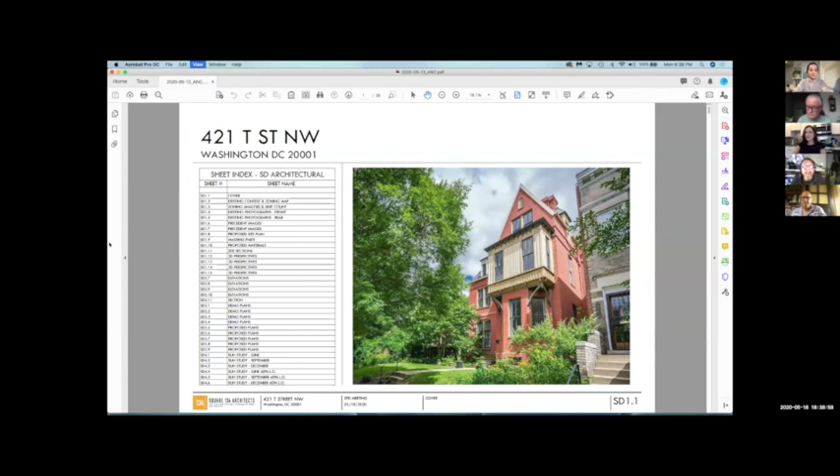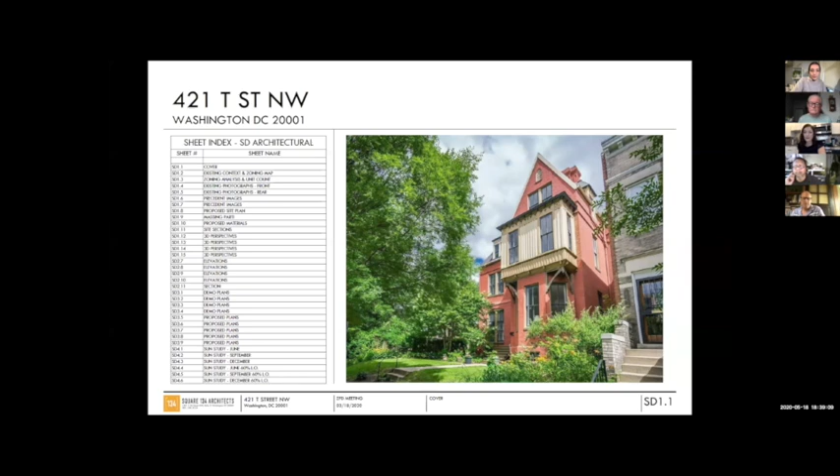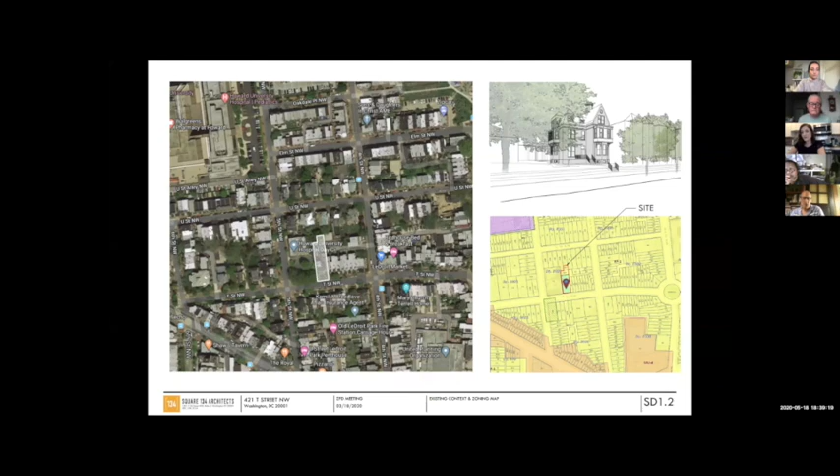This is 421 T Street. It was originally designed by James McGill, in the Victorian style, built in 1876. The property is located in LeDroit Park's historic district, on T Street between 4th and 5th Street Northwest.

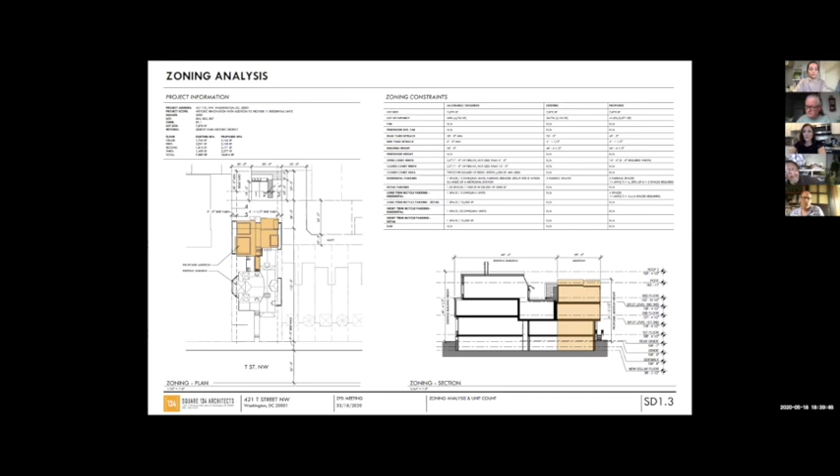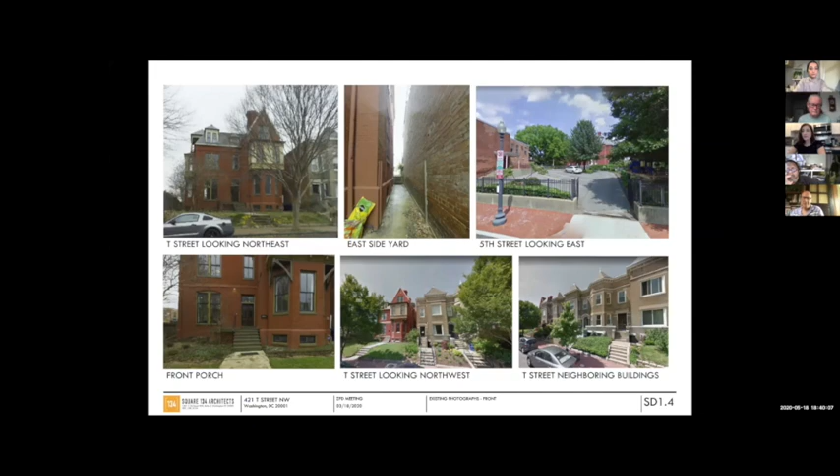Zoning will be covered by our land use attorney in more detail later, but as a brief overview, we are proposing a 29-foot addition, increasing the lot occupancy from approximately 27% to 42%, maintaining a proposed rear yard of 47 feet, with side yards matching the existing side yards of the property. For the existing building, we're interested in maintaining the character of the existing facades, and we were drawn to the asymmetry of the building, the geometrical ornamentation, and the variety and playfulness in both the bay projections and dormers.

For the proposed addition and changes to the existing building, we were very intentional. We're interested in removing the one-story addition along the west facade. Window changes were limited to the east facade because the majority of that facade is covered over by the adjacent neighbor. The rear addition will only take place in an area where there aren't any windows, so we wouldn't be impacting the original character of the exterior building.

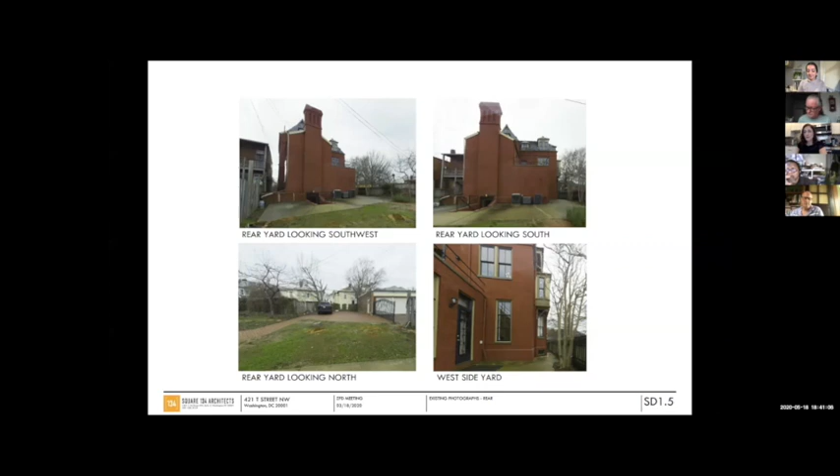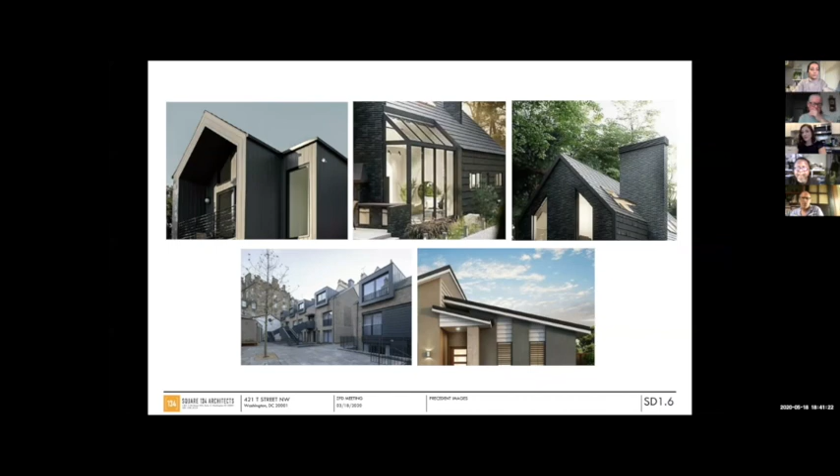We also met with HPO prior to doing any design changes to the building, and have been working with them diligently to develop the design. This is also about taking forms from the existing building and replicating them in a more modern interpretation, emphasizing the playfulness and ornamentation by providing bay projections and dormered windows.

We're also interested in using simple materials and forms to create a difference between the original facade and the proposed addition, using materials similar in proportion to relate to the existing structure. We also wanted to provide some form of transitional space between the original structure and the proposed addition.

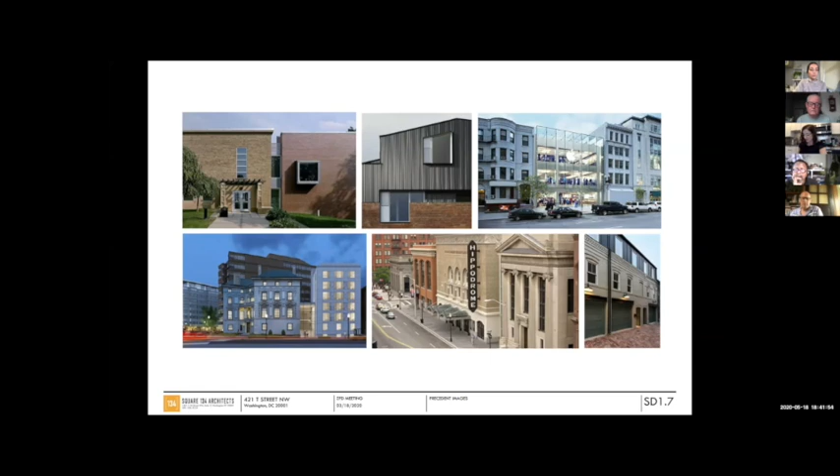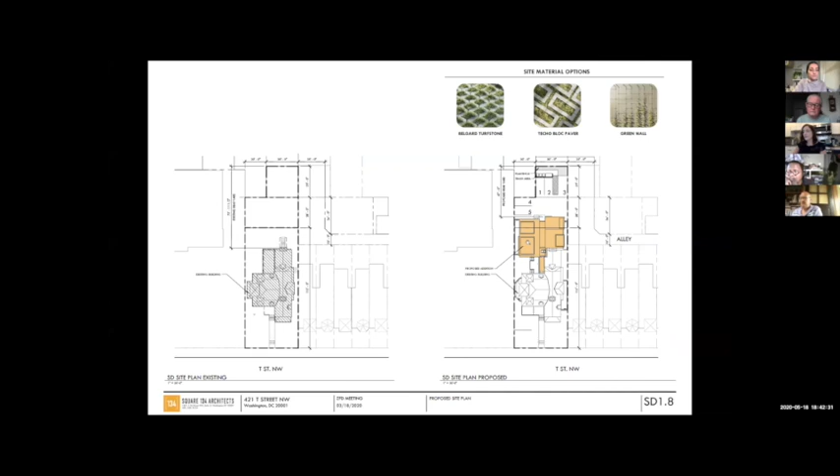We were also interested, in our proposed design, in taking the original massing and developing a courtyard where we could mirror or flip that projection to create our new design between the two. The intent is for the courtyard space to be a transition space between the original building and the proposed addition.

We were also interested in carrying over the prominent roof forms from the original structure to ensure proportionality and alignment with it. But we did want to make sure the addition is lower in height than the original structure, to maintain deference to that original building.

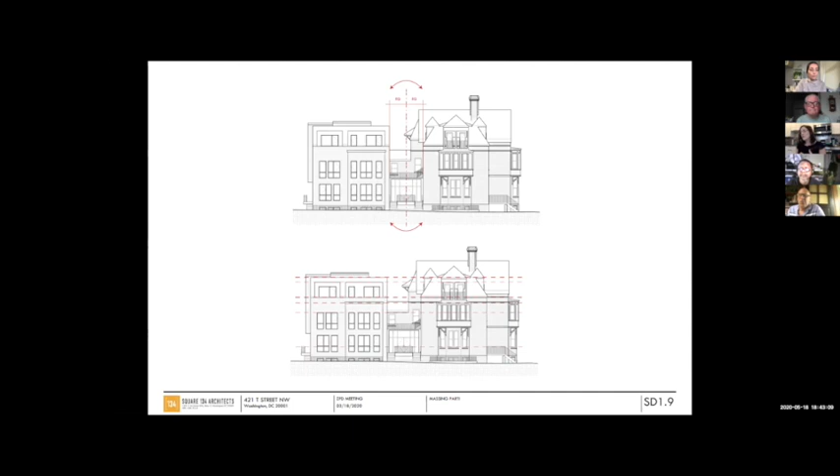For the materials, we are interested in using modern materials that are in similar proportion to relate to the original building, but yet still distinguish the addition from the original building.

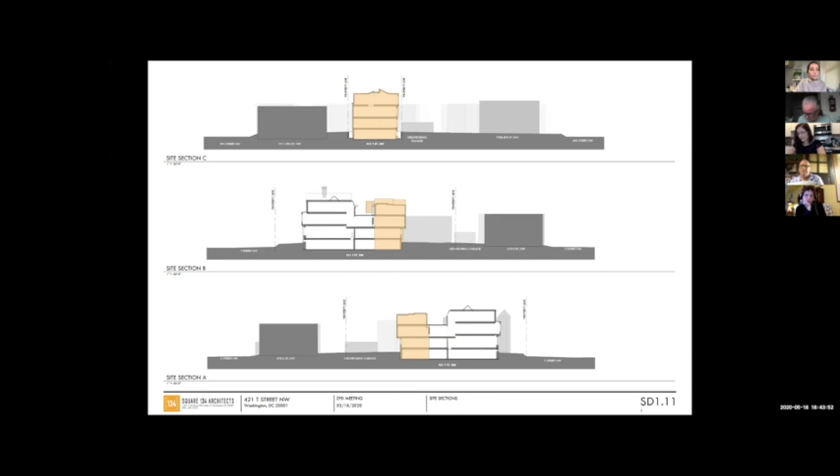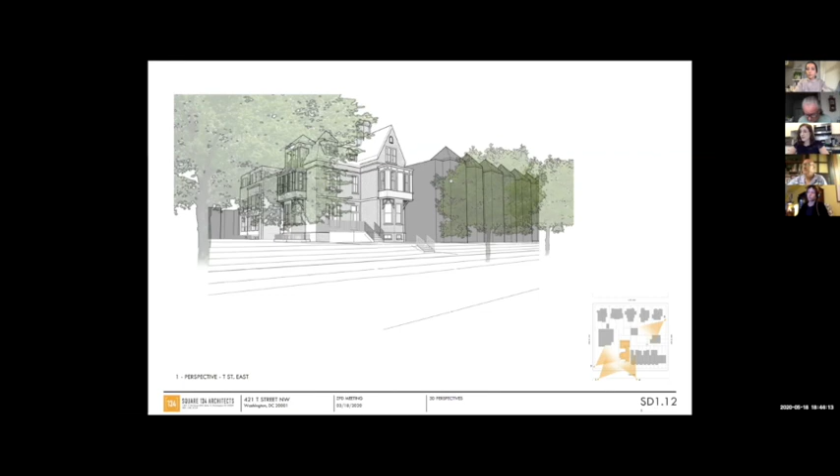To emphasize this design, we've worked with historic preservation quite a bit to develop the massing and proportions to be where they're at. The key elements we were interested in maintaining from the original building into the addition: carrying the roof plane across between the original building and the additions, breaking up the massing by providing dormers and bay projections, and emphasizing the asymmetry of the original building with the changes to the addition.

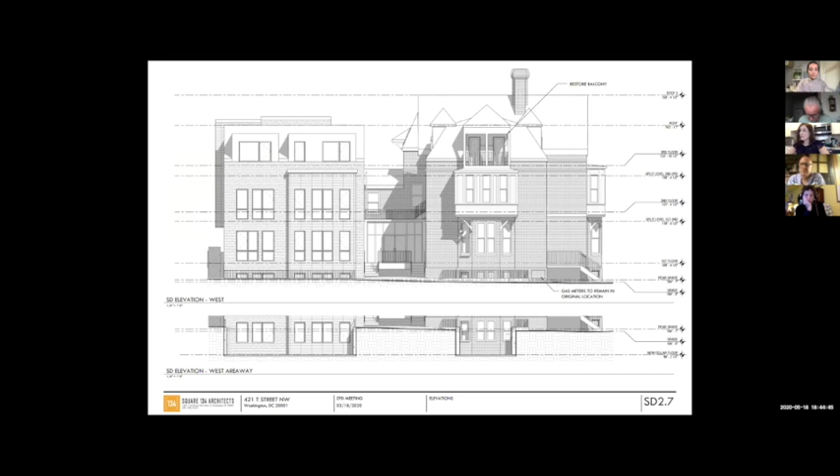Some other key elements we wanted to note: we're intending to extend the porch back to its original length or distance, and we're also looking to restore the original balcony. We plan to keep both chimneys in place for the design, and by removing that one-story addition, we were able to restore symmetry within this elevation as well for the windows.

In terms of height, I know it's higher than what's allowed for maximum height under the zoning criteria, but again we wanted to make sure the addition is still lower than the original structure. A key reason we ended up with the height where we're at is really the constructability of the building.

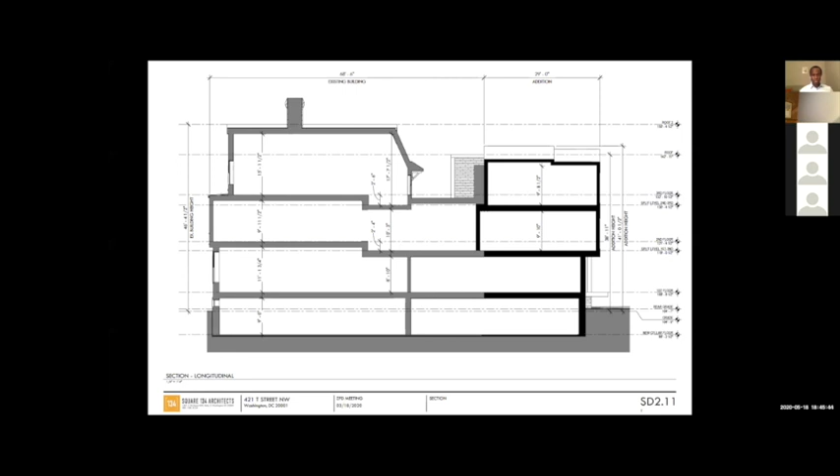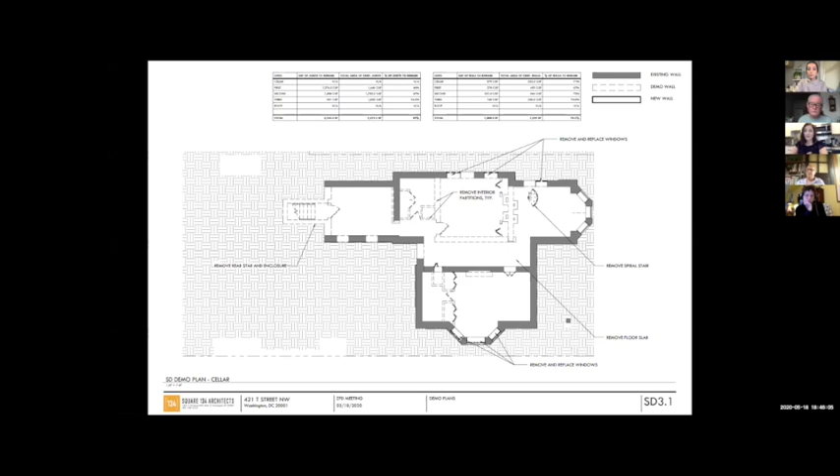The existing building already has two different heights for the 2nd floor and 3rd floor within the design, and we purposefully picked the lower elevations for the 2nd and 3rd floors so we could maintain the original heights of the structure while still having the addition be lower in height. In terms of demolition, we're maintaining 89% of the original joists and 70% of the original walls, which can be noted in the demolition plans.

For the proposed design, we're looking to have a total of 11 units, all of which will be 1-bedroom and 2-bedroom units. The majority of the neighboring properties are around 2-bedroom units close to 1,300 square feet, and the proposed units within this project are in line with what's comparable to the neighborhood. We're also providing a number of amenities, including a bike room and amenity space on the cellar level, and a common deck courtyard area between the proposed addition and the original structure.

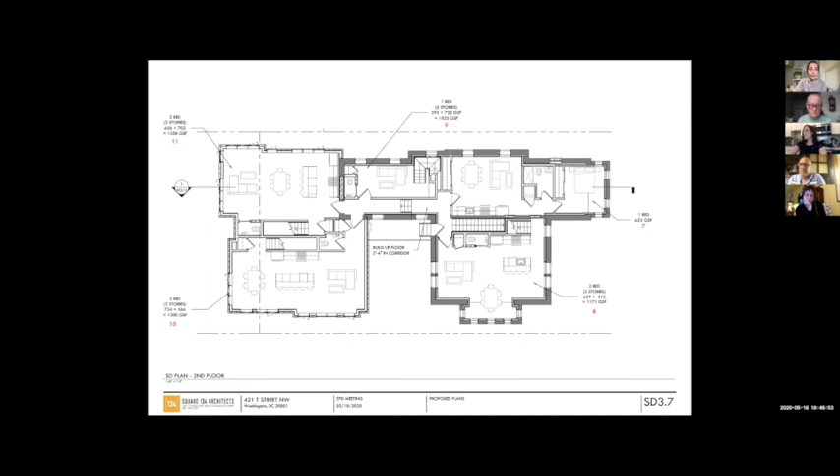And this is just quickly going through the plans.

For the shadow studies, I'd like to first point out that the first set compares the proposed height to what's allowed as matter of right for 35 feet. You'll note that in areas with slight overlap, the additional shadow from the 35-foot height to the proposed height is pretty minimal.

I'd like to note there will be shadows for the neighbors along 5th Street in the mornings, and in wintertime, shadows to the rear yards of units along U Street. But in terms of increased shadow, the majority falls just within the alley or within the rear yards of the property.

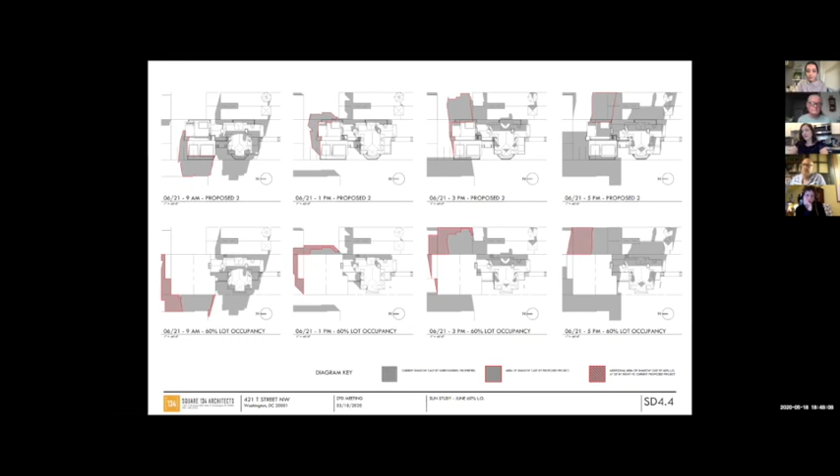Just as a point of comparison, if we proposed a structure at 60% lot occupancy and 35 feet in height, the amount of additional shadow cast would be significantly more than what we're currently showing.

And with that, I'd like to turn the presentation over to Marty Sullivan to go over the zoning.

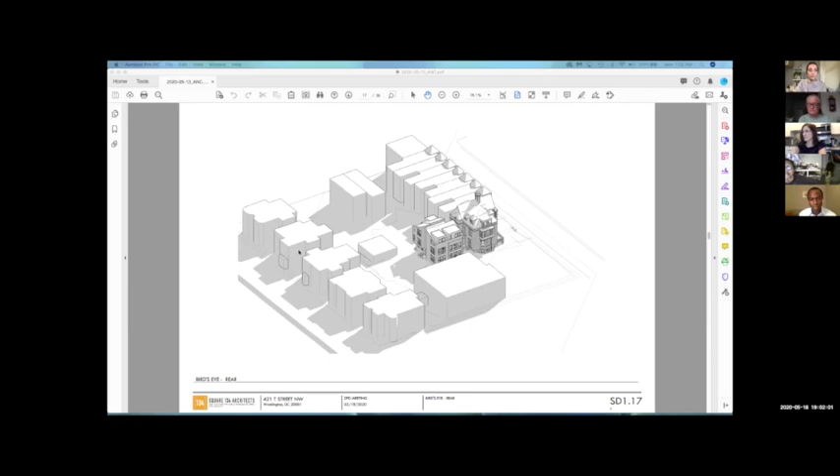Okay thanks. This is Melanie from 1B06. While you have this up, could you show us both where trash will be stored and where it will be brought out for collection? And I'd like to take another look at the shadow studies. So we are proposing that trash be stored behind the parking in the rear area.

You would access it through the same drive aisle separating the accessible parking space from the remaining spaces, and all access would be through the alley. How is that separated from the opposing street? This is Joel—how is it separated from the opposing street or opposing property? This part here is someone's rear yard, this isn't a street. Okay, so this backs up to the property on Elm Street.

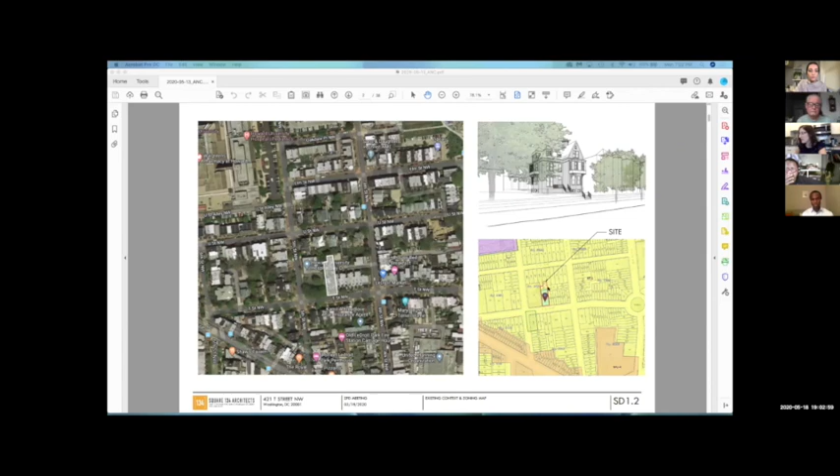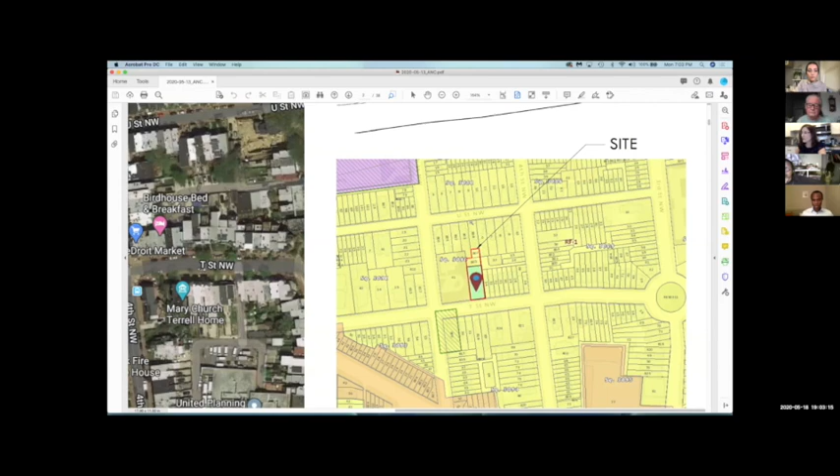This is U Street. These are the rear lots of U Street. Let me zoom in here. The site is these 3 lots, and there's an alley connecting to 4th Street, and through that alley comes in this way. For the access, here's the alley where it jogs to an L shape, and you would enter from the alley into the parking area here. Trash would just be stored here.

So let me piggyback on that question, since it needs an answer. The alleyway is not a wide alley, so this building, if done the way you're proposing, is not going to be serviced by the District of Columbia. How have you looked into how that trash is going to be picked up? Because if it's picked up by a regular non-district truck, it's going to be a much bigger truck that won't be able to come through the alley. So you'll have to figure out how it's brought out—I'm assuming you're going to be using roll-off cans.

Chris, do you want to answer that in more detail? Correct, yes. We have Tenleytown Trash as the trash operator for the property, and they helped with the design of the rollaway bins, including recycling, as well as the size of the dumpster, to be able to get into alleys that are actually smaller than this one in the district. So you're saying they have a truck that can fit in the alley? Correct.

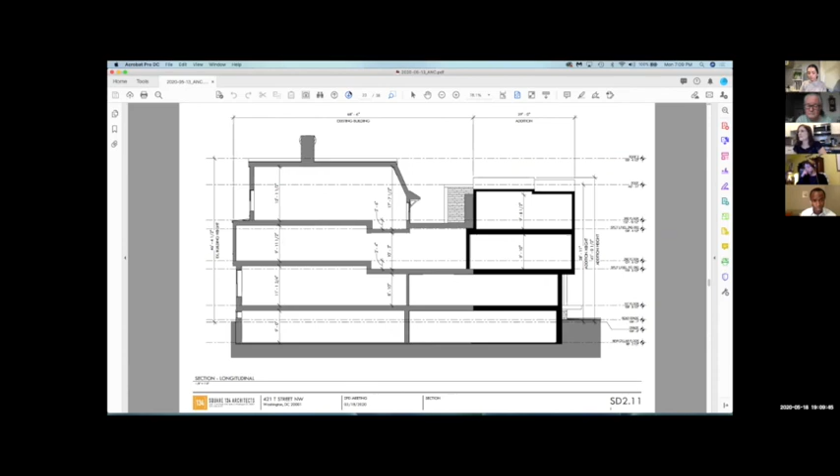Did you have any other questions, Tony? I'd love to ask about the shadow study a little more. That's it for me now. Okay. So could we look in a little more detail, Emily, at the shadow study, particularly how it affects the property at 417 T Street, please?

I think Emily's on mute. Could someone help her out? Unmute it. Okay, go ahead. Am I unmuted now? I'm sorry about that.

Okay, so 417 T Street is the neighboring property, and the addition is not until after their property ends, really in the alleyway. I think it only overlaps with about 3 feet. So the shadow studies, at least from what we saw, were pretty minimal compared to what's actually already occurring on 417 itself. You can note that the majority of the increase in shadow is actually just within the alleyway.

Can you just run your cursor along the line of the rear property line for 417? It is this line right here. Thank you. And at that line, is that parking? What is happening there? That's yard? So this is the L shape of the alleyway. The alleyway turns at that point, so the alley comes down here, and then this is still all alleyway. Got it. Are people parking in that alley?

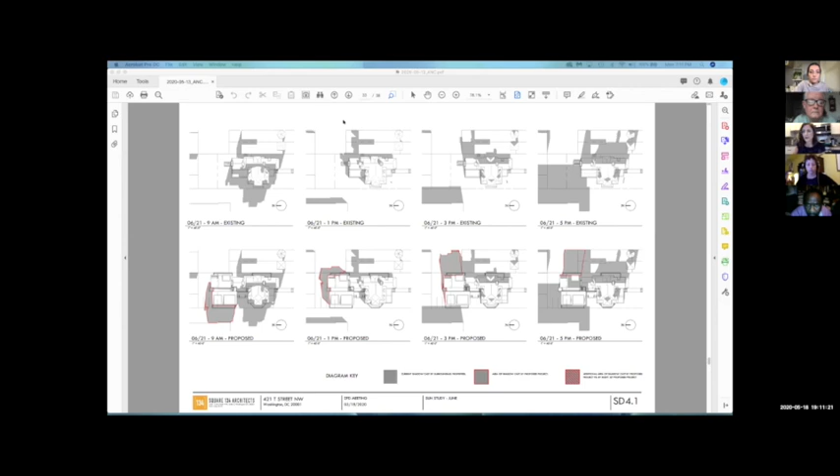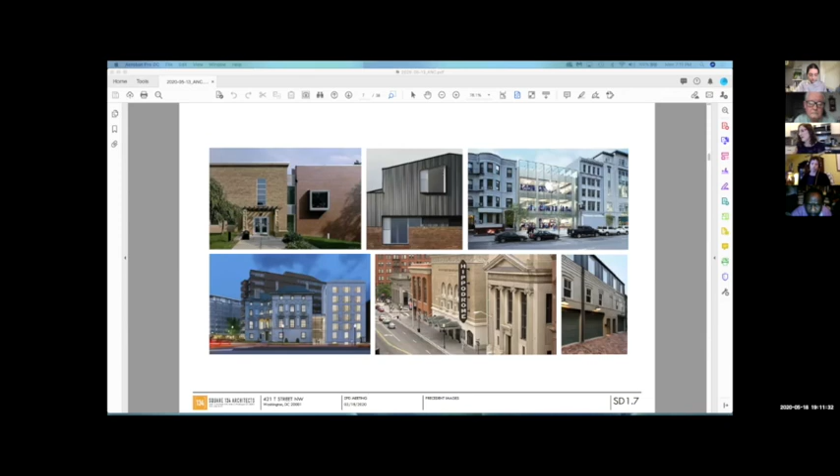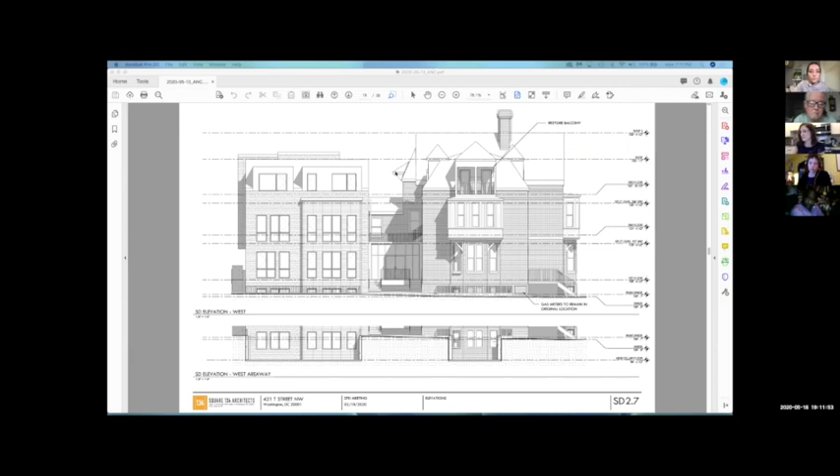For the shadow study for December for 417 T, could you show us that one again too? I'm sorry, I think someone else was trying to pipe up.

I just wanted to say to Melanie that the 417 owners have a parking lot on the rear of their house that they use to park. So I think that's part of what you were trying to get at. Yeah, there are spots made in the backyards for people to park, but no one's allowed to park in the alley. Thank you.

Yeah. Okay. Am I off mute? Good, yes you're off mute. Thank you, so this is for the winter studies.

That's very helpful. Thank you. Those were all of my questions. Thank you, Patrick.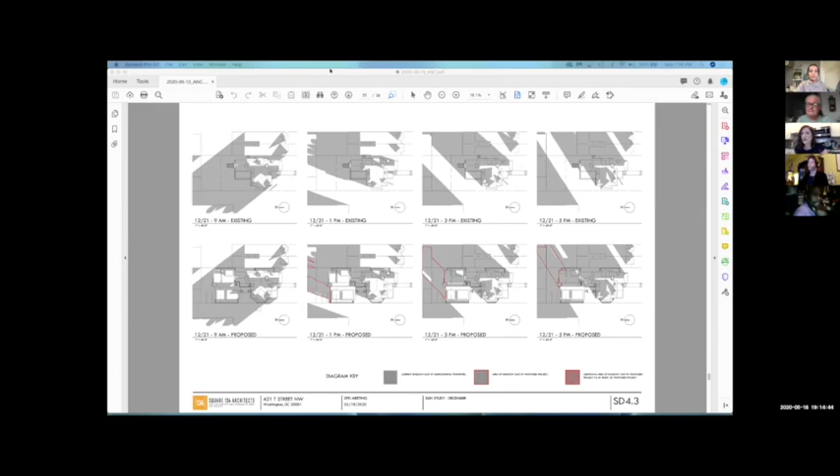Okay, I have other questions for Marty, if he's still here. I'm here. Okay, Emily, should Marty take it off the screen so the people come back? Yeah, it'd be nice to see people rather than that. Okay, yeah, hey, great, Marty's hiding from us, of course. No, you can't get away from me, Marty, you know that.

The IZ regulations and the RF1. The reason there's only one ever been done is because it's simply unaffordable, and it's structured that way, that they didn't want people building an RF1. Normal IZ of 10 units above is like what, 6-7%? In RF1 with this 2-4-6-8, you're either 25% at a minimum or 33% IZ, which is unaffordable. That's why IZ units aren't built in RF1. The way the zoning is defined, it's virtually impossible to do it. So the fact that you're saying, okay, you have 4, hey, wonderful, but RF1's not designed or amenable to doing that.

That's more of a statement. Is that a question? I do have an opinion on that. That was more of a statement, because you're making a big deal of 4 IZ units that there were never any others provided. It's because I guess RF1, I would...

If I could just address that issue - that's an opinion. I don't think that the zoning commission intentionally put an IZ component in there to make sure that nobody actually ever developed a 4th unit. Well, they did it unintentionally by not thinking about larger units, when they only require 6 or 7% of the square footage to be IZ, when in the RF1 what they're really requiring is 25 to 33% of the footage.

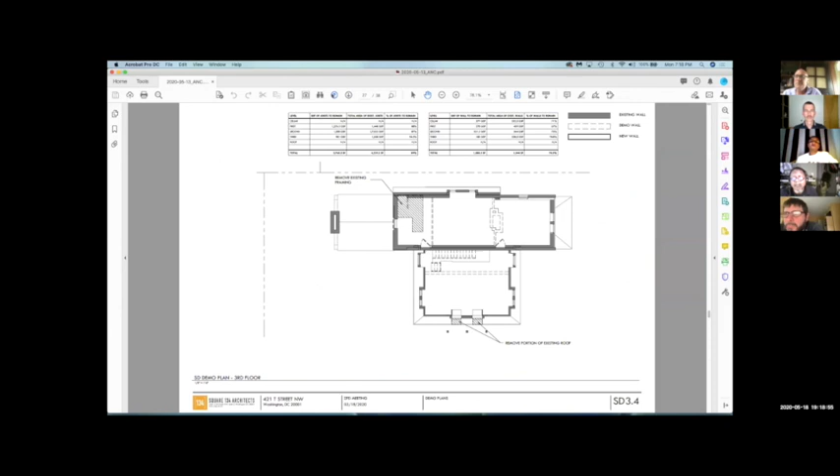So in other words, all 1 bedrooms. They are all 1 bedrooms, about 700 square feet, as I'm flipping through here trying to catch numbers. The 2 back here are 1730, 665. This one is a 2-story unit, a 1 bedroom at 968. And unit 7 is also a 1 bedroom at about 650 square feet.

So all the smaller ones, and all the others are 1100 and change, 1300 there's one. Yeah, which, you know, is okay. That's the way you're going to do it. That's how you get them to work - make the smallest units and make the other ones bigger.

So there are other units that size in the cellar level, but obviously we're not using those. But there are additional 1 bedroom units that are not being utilized towards IZ. And so the 1 unit that is in the cellar is actually 2 levels - on the first and the cellar level. Yes, unit 2 is on the first and cellar level. Okay, thanks.

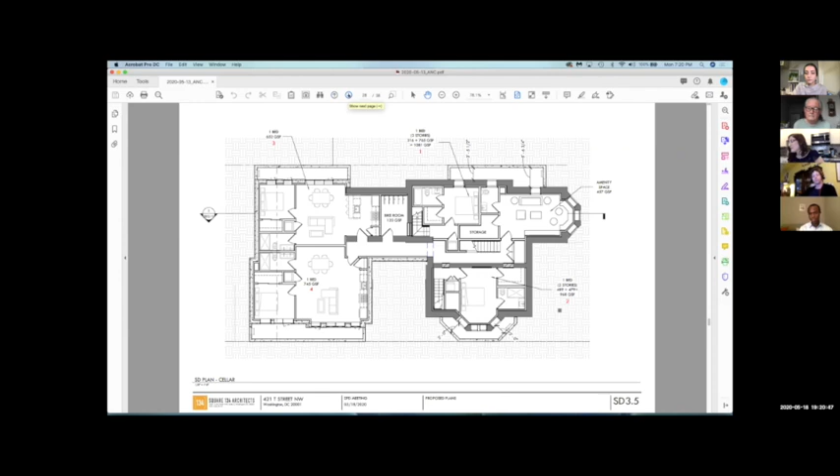Okay, so back to Marty and the BZA, what they like and don't like. You still with me, Marty? I'm here. Okay, all the experience I've had with BZA is they have a firewall at 900 square feet. Have you ever come across a case where they've made any variance to that?

Yes, admittedly, it's not the easiest variance for them to approve. I had a case where it was a trapezoidal lot - 50% of the lots by right could do a 3rd unit. We were 150 square feet shy of a 3rd unit and they denied it. And here you're asking for 3 extra units that you don't have the square footage for. I don't see BZA approving it. And compared to everything else in this area in LeDroit Park, it's really overdeveloping the lot. That's just blunt, opinionated me.

I hear you, and I guess my response would be, well, nobody has asked for this yet since the special exception was instituted 5 years ago. There were instances of variance relief from the 900-foot rule prior to the change in 2015. They did get a little tougher. My ask was just 2 years ago.

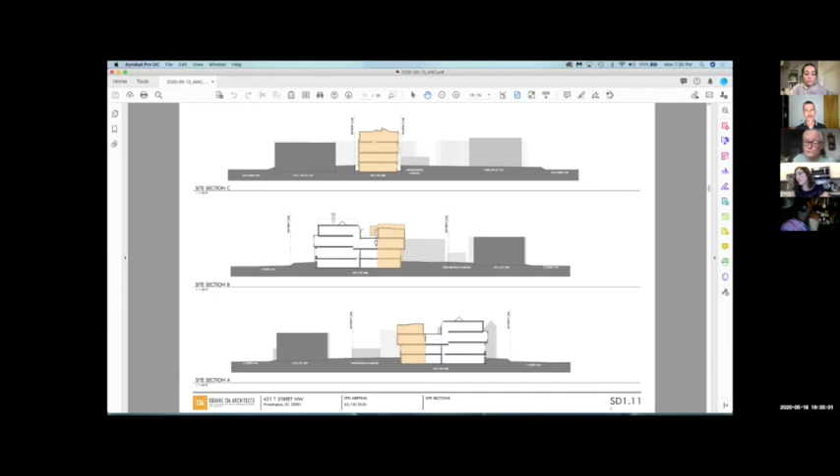In terms of the forms, going through from the perspective settings, or at least starting with the parti, when we've been working with Brendan, his main focus has really been carrying across this roof line and carrying across this roof plane. We had originally shown an option breaking up that facade with the dormer passing through that plane, and he was very adamant that we should maintain that plane and have that separation.

They were actually even in favor of a little bit more randomized window pattern than what we're showing, because additions a lot of the times, especially along the rear, don't have as much uniformity or placement for the windows. It's more of a reflection on what's in the interior as opposed to the overall exterior aesthetic.

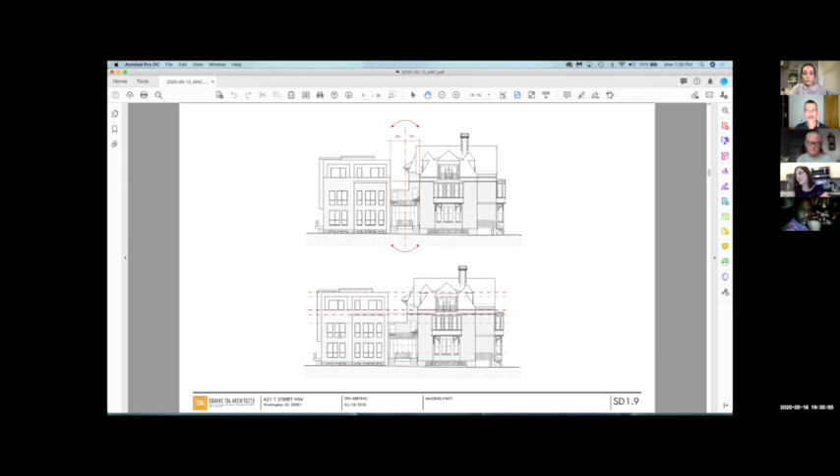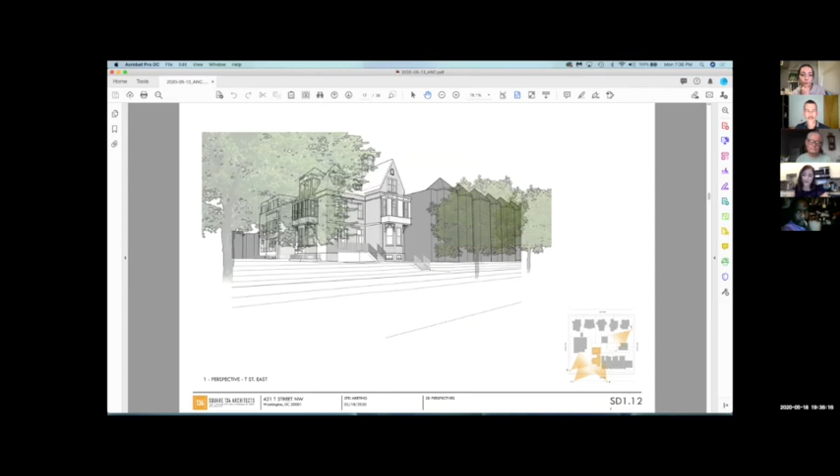We were trying to be more in repose. I think making sure that this massing had a projection, and we also wanted to ensure the proposed addition did as well, as a way to create a delineation or break up that elevation, especially along 4th Street, because it is the most visible. The areas where we were given more intention or allowed a bit more varied expression were the views facing towards the alley.

But there wasn't really a strong opposition to carrying over this gabled roof form from the original building and playing off of that plane.

Thank you. Yep. If I can just jump in, if Bill is finished.

I haven't made any HPRB comments because I have an issue with the number of units. I think a reduced number of units would reduce the addition, but I agree entirely with Bill. I think it is very overscaled for an addition on this house, especially since it's one of the few single family McGill houses left, and you say it's diminutive—it is, but even if it's 80% of what it is, it's connected, and it's a very, very big addition.

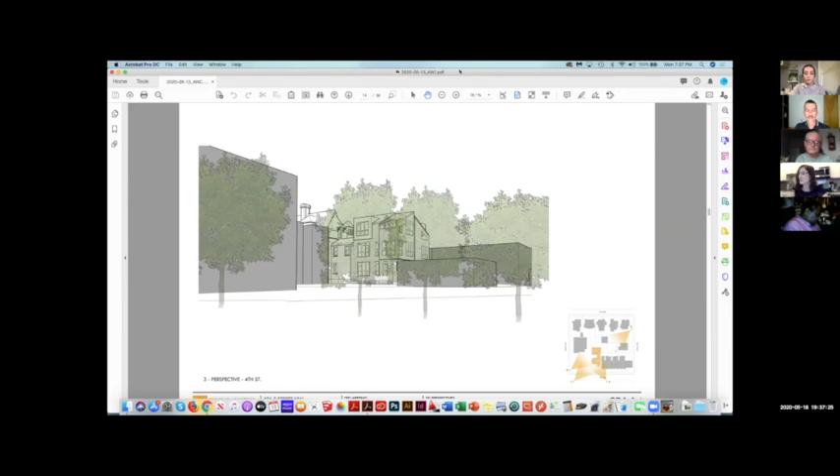Joel, when you say it's one of the last single family McGill houses left, what does that mean exactly? That hasn't been renovated. Okay, thanks. But it does technically have three different units in it, whether or not the occupancy was legal. They were illegal, yeah.

Okay, any other questions or comments?

Okay, so at this point I will give Ms. Norman, who is the SMD member, a chance to weigh in if she has any comments before we turn it out loose to the community at large.

I do not have any comments at this time, but I thank everybody for coming onto the Zoom to give your input. This is an important issue in our community, and we have several members who live on U Street and T Street who have strong opinions about this development, and I'm here to learn and support and assist any way I can.